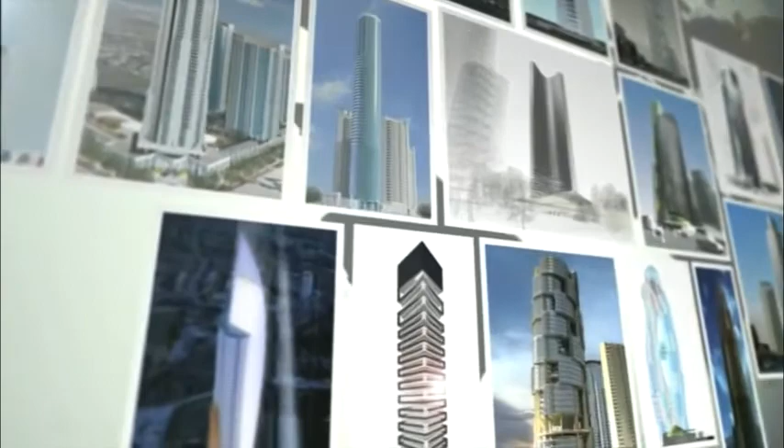I like the Absolute for a couple of reasons. First of all, I like the way they did it. The fact that there was a competition. I've never heard of such a thing. No one believed that a private sector company would ever do that, expose themselves in such a fashion. Not only did it bring this cross-section of designs from all over the world, it brought attention to the project on a global scale. And it wasn't long before we received well in excess of 600 registrations. And from there, we received 92 submissions.

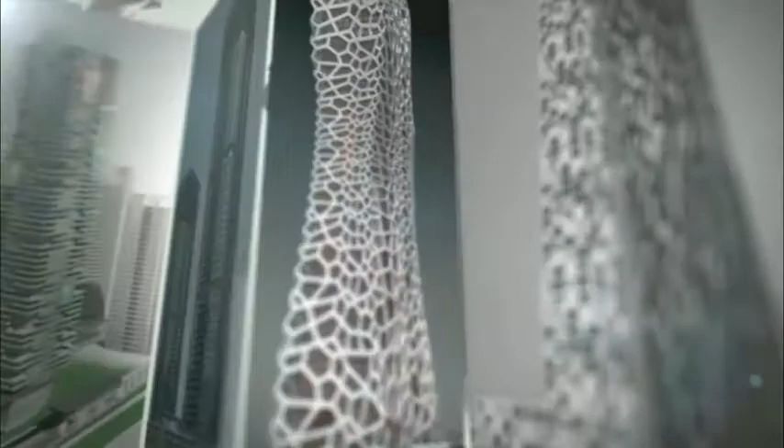We never expected to have such a result. We were overwhelmed. And then it was left up to the jury to decide who the finalists were. There were ultimately 6 that were shortlisted. We kept the finalists under wraps up until the time of the presentation to the public, and we had a ceremony at BCE Place. The finalists were then presented to the public. That same exhibit was basically taken on a bit of a road show. And the public was asked to comment on what their favorites were. When I attended the presentation, they were very unique, very different, and I wondered which one would be chosen. I remember one day we got an email, but when I opened it, I saw congratulations.

Mississauga has ambition to build a future. So I think the question is, what does the future city look like? In the high-density urban context, we should introduce nature. I was quite sure our tower shouldn't be another memorial or symbol for strength or power. We should introduce this beautiful curve, the softness. I think it is trying to connect with nature and to be at one with nature, the ebb and flow of life. I like the way it changes as you move around it. The view is slightly different. So the building looked like organic life.

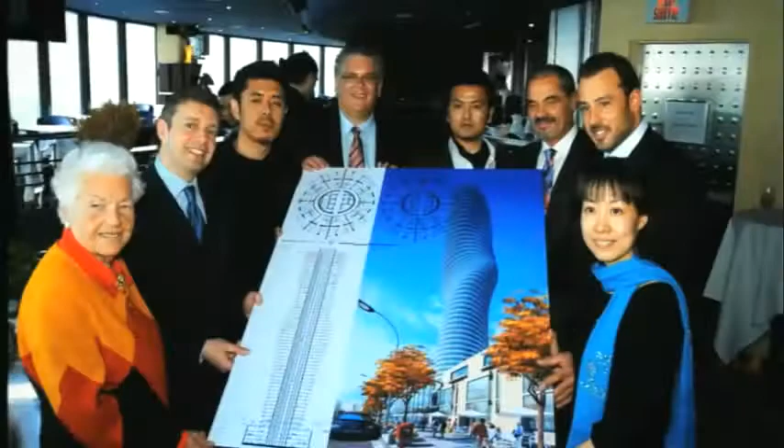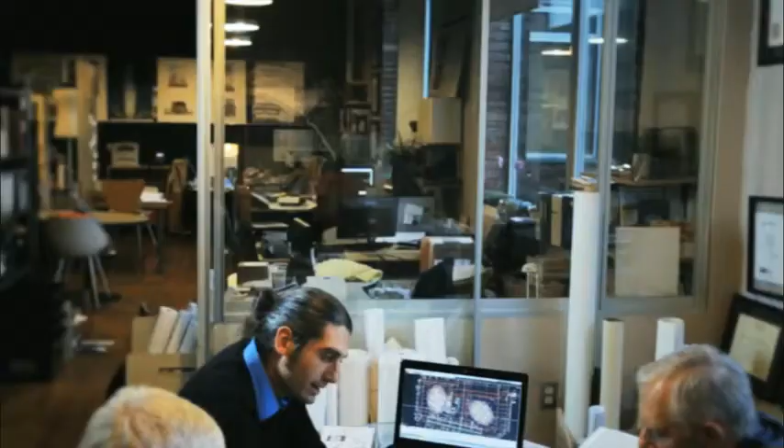In order to eliminate thermal break, to isolate the balconies. I wanted us to be true to the original design, and I made that very clear to the design team from the very start. Consultants are an integral part of any project, but on this one in particular, because it was such a complicated building, there were daily meetings. So we now had this great design, but we needed to sell the units.

The marketing team that we had assembled created the interest among the buyers. Mississauga had not seen something like this before, and they were ready for it. It was a mad rush. People said, I need to buy a unit in this building. I mingled with the crowd prior to us opening the doors, and I've never felt that kind of buzz.

On the first weekend that we opened the sales office, we pretty much sold out the building. At that point, we decided we were going to move quickly forward with the design of the next phase, and we sold that out in a matter of a couple of days as well.

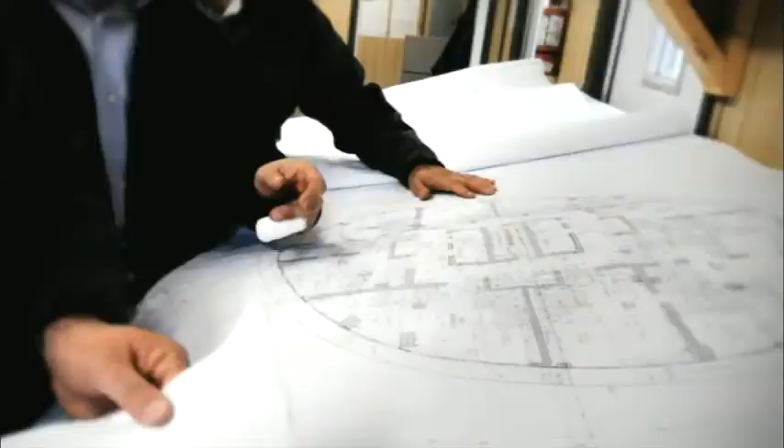Usually we spend 3 to 4 months before we start digging. I think we spent close to a year before we started digging with this project. Obviously, structurally, that was the biggest challenge.

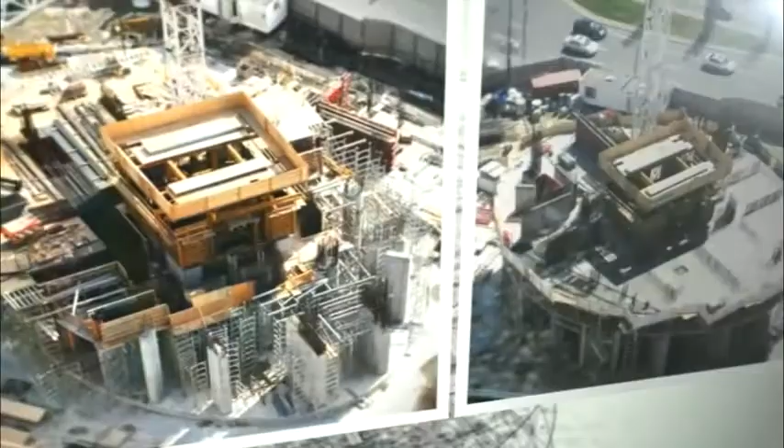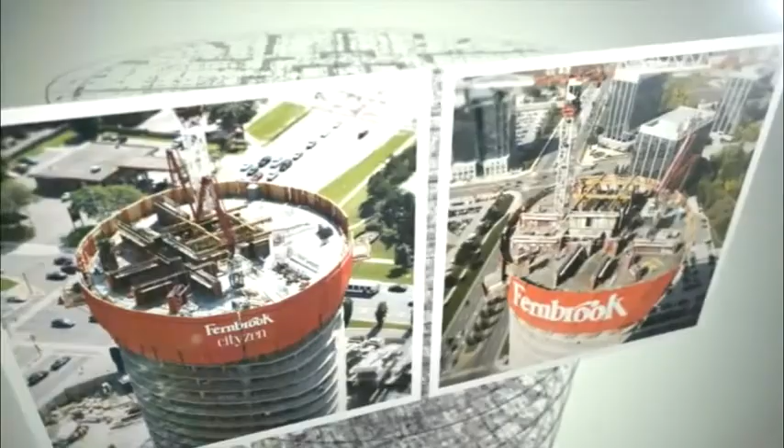Every floor was different. Each level, starting from ground floor to the 56th floor, was basically built floor by floor, starting right from scratch, and every floor was always unique. And it wasn't only the structure, it was every discipline of construction that had to deal with what was next.

Have you dealt with the wall forms and the pipe space in this particular area here? Yeah, it's very innovative, and we had to be innovative on our side. Innovative in the techniques, the details, and taking out their thinking caps, dealing with every part of construction, from concrete to windows to kitchens to electrical, mechanical.

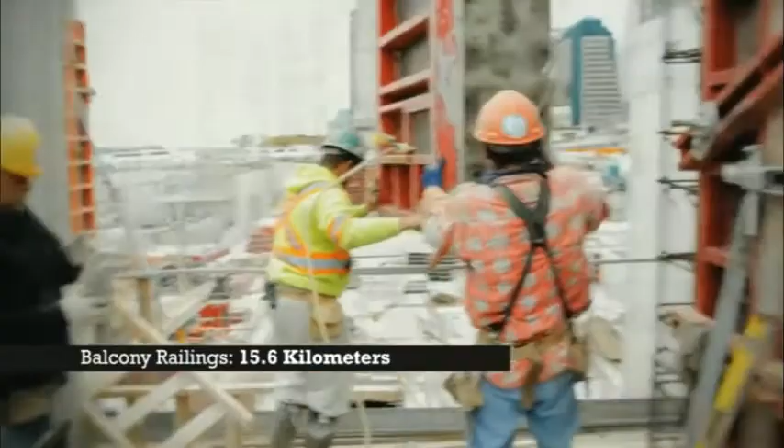Whenever there was a challenge, everybody got involved in it. We got a lot of great response from the city.

There was a lot of toing and froing between my staff and the consultants and engineers. With permits, construction details, engineering, they're also part of the team. In hindsight, without that involvement and without that interest, projects like this won't happen. Everyone worked together to make the building happen.

It very much is true to the architectural intent that Yansong Ma had when he first made his submission. Many people thought we would fail, but here it is. In your career, I think you only get one time in your lifetime that you're going to build something like this, and it was something that we all wanted to do.

It's so wonderful that the private sector took the initiative. I really would hope that other cities would now take a look at this and see what Hazel has been able to do with her collaboration with us.

The city's openness to zoning was a catalyst. It allowed this creative expression to be entertained in a serious way by business. The opportunity was rare, not only for me, but also for a city like Mississauga.

As far as modern architecture goes, it's one of the finest buildings in the world, and it's being acknowledged that way. These buildings are helping to shape that image for Canada. The absolute is the most striking condo design that I've seen in my time at the Star. Mississauga now has a skyline, and it's punctuated by these spectacular buildings, and I think that shapes the image that we have abroad.

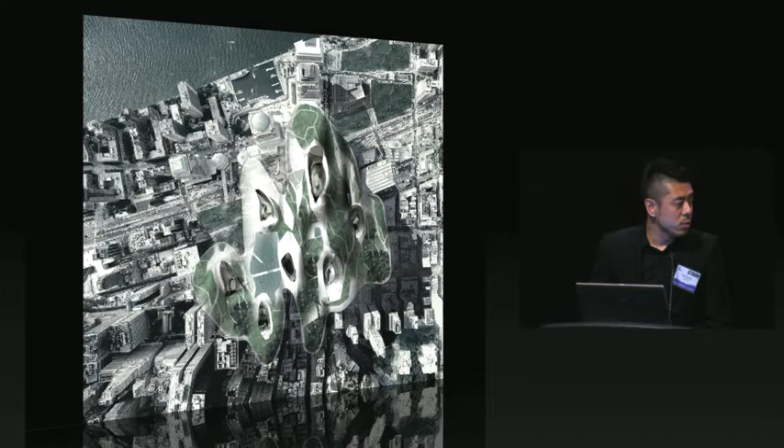But we were imagining something more organic, more like this one. This shows a horizontal connection between all the vertical towers, and there's a park on top of it. So we're trying to introduce nature into our cities. Of course, at that time, we didn't know any structural engineer, and we didn't know how to do this. Later, because I'm from China, where a lot of new towers and new cities are being built, we were talking about the future city as well. Is there a possibility to introduce more humanity and nature into our high-rise?

In modern times there's a motto that says a building is a machine for living, right? But do we all like to live in a machine in the future? Then we participated in this competition, and very luckily, we won. This photo was taken at that very happy event.

And then the very abstract image of the proposal. The tower got a nickname, the Marilyn Monroe Tower - that's what I remember from the Canadian media. I was happy, even though I didn't think of it that way when we designed the building. But I thought it was interesting that people link a high-rise tower with a female human body.

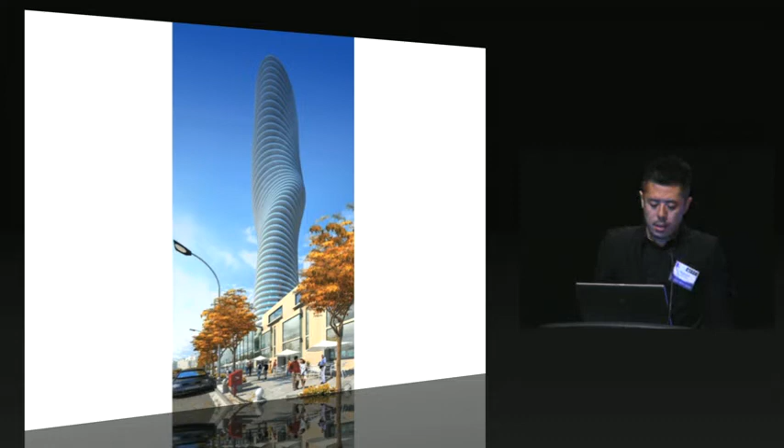As Joe said, the marketing was very successful. Then we had to design the second one. The second one is very interesting because two towers make an urban space rather than just one sculpture. Here are the two towers - they look different, but they look like sisters, so they belong to the same family.

But it's different from all the other twin towers around the world, because following the modern philosophy, all towers are about duplication - all the floors are the same, and if you do a twin tower, they're also the same. So we wanted to do something slightly different. We used the same floor plan, but changed the rotation rules, so we made two distinct towers.

Here's the final rendering for the towers. And then construction began - here you can see the two towers start to grow and take shape.

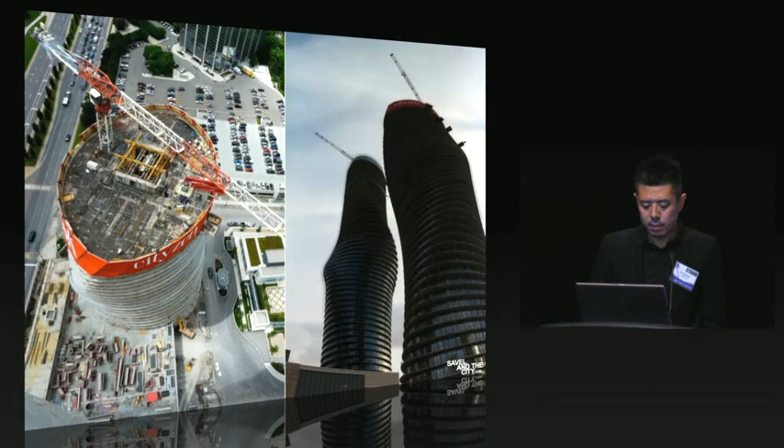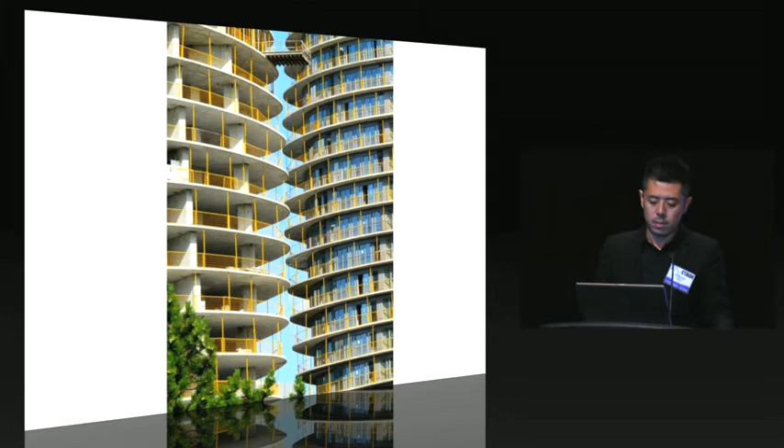The design not only uses a curved language, but also introduces balconies on each level. So every unit, whether big or small, has a big terrace, a big balcony. And when you twist the floor, a lot of the balconies actually have the opportunity to open up to the sky because they're rotating. Those balconies also provide natural sun shading.

So in this tower, we don't have any expensive material or so-called advanced technology. I think we tried to use very mature technology to achieve architecture.

Because I think today, what high-rise needs is to be architecture. I don't believe high-rise is something we can challenge for high technology because now humans go to Mars. It's not like 100 years ago. I don't think humans can show their imagination or ambition by just building high.

Now we're trying to change the cityscape because we have two towers, and when you look at them from different angles, they always look different.

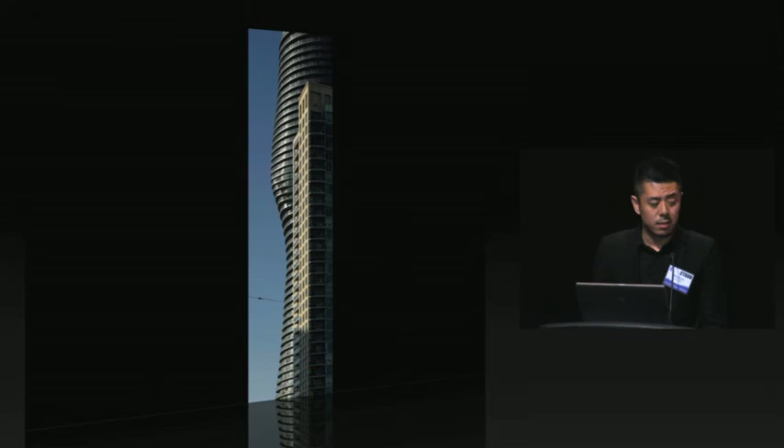You can see the Toronto downtown in the far distance. This is actually a satellite city of Toronto. You can see the contrast between a typical residential building and the new Absolute Tower building. This is a view from the bottom, and from the top.

From this photo you can see the two towers have a dialogue. They have a different shape, and you can see the other tower from your balcony, and people in the other tower can see you. I think it's an interesting relationship.

Here, when you look down, you can see the balconies below. Actually every balcony could have this open ceiling. This is a quite recent photo, people start to enjoy the balconies, and they use them in different ways. You can see the difference between this tower and the other, more traditional residential towers.